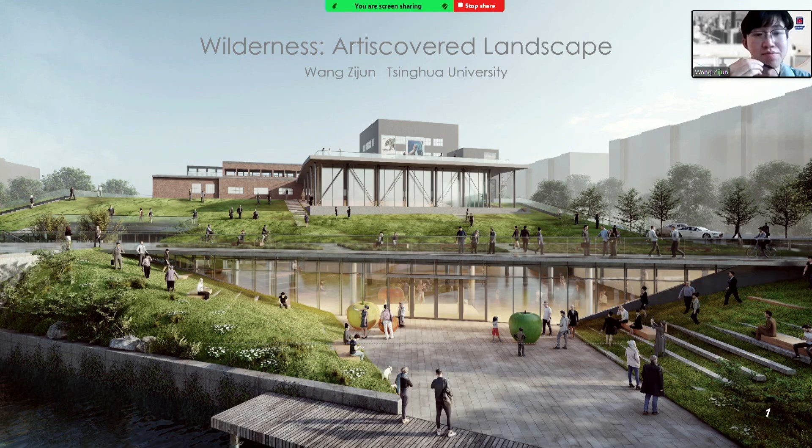The title of my project is The Wilderness: Artiscovered Landscape, and my design originates from the history and culture of this place.

As the city and campus expanded, the art community gradually disappeared. In the midst of policy changes, a group of artists mostly followed a large group to Tongzhou, the suburbs of Beijing, and the culture and artistic atmosphere that had formed at Tsinghua's North Gate moved with a very large number of the artists group. Here they experienced the transformation of their lives and left indelible footprints of their thoughts.

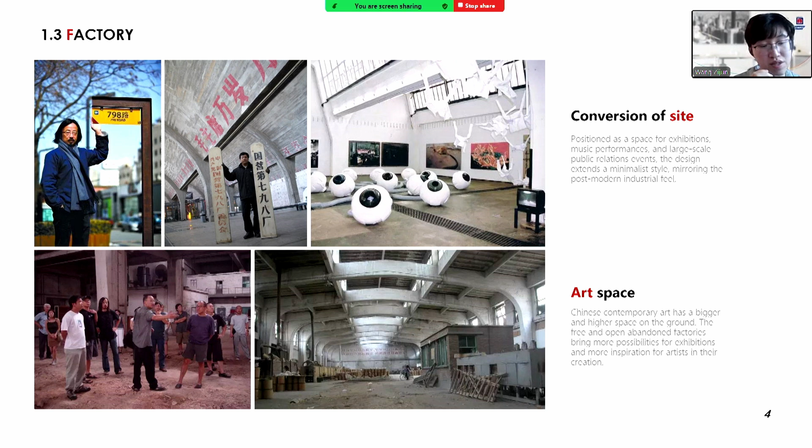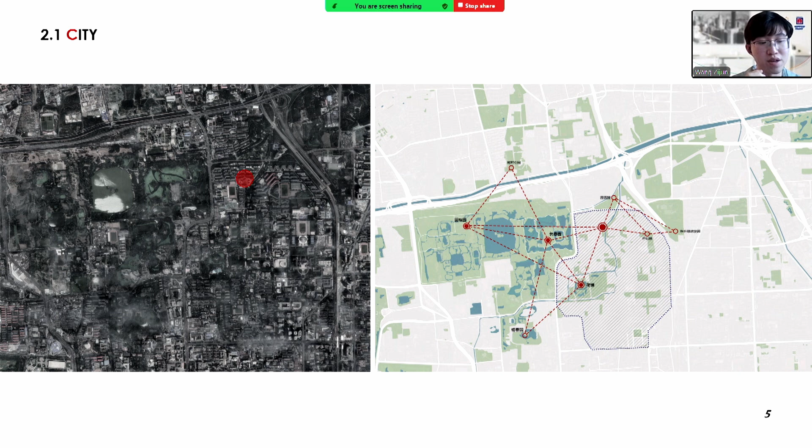The following two diagrams show the landscape pattern of this site, located in the heart of the Three Hills and Five Gardens in Haidian district of Beijing, corresponding to the surrounding country parks near the Yuan Garden. The original site of the building was the old Tsinghua power plant, no longer in use, which we hope to transform into a charging station and energy space for our campus and the community.

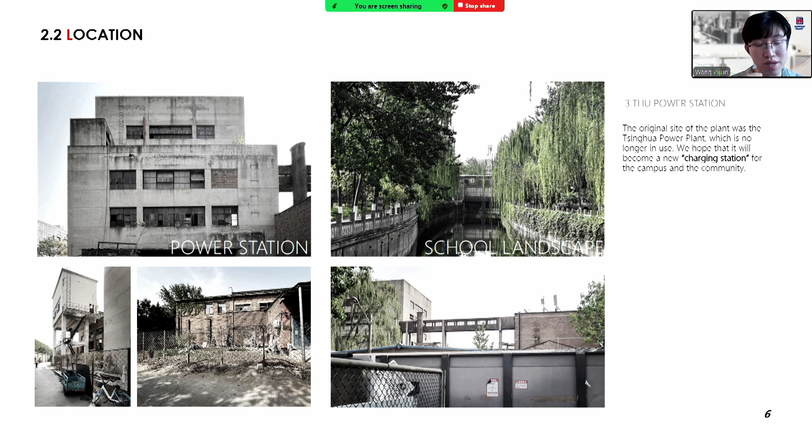Near the old power plant is Tsinghua University's river and greenbelt. We try to put the waterfront green landscape of the campus into the city and serve the people, old people and students in the neighborhood.

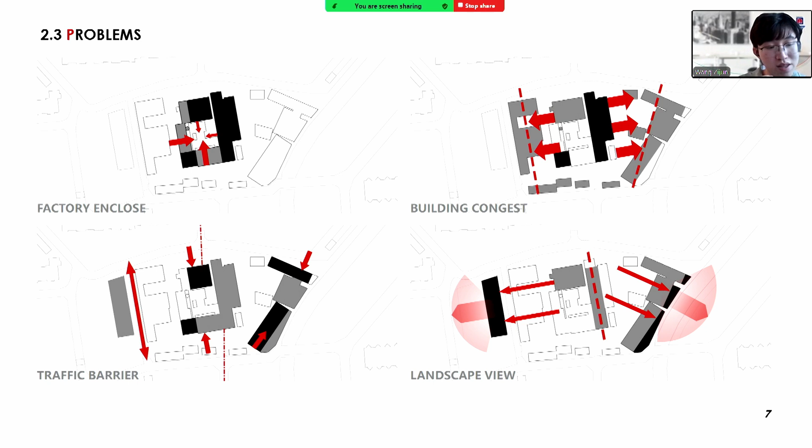Inside the site, the current situation presents the following problems. Each power plant encloses a centripetal space inside the site, and north-south traffic can be organized through the tall, long direction plant, but east-west traffic is blocked by the various small cottages around the plant. Although the east and west sides are surrounded by campus landscape, the good orientation is blocked by the existing buildings inside the factory.

So for my idea, artiscovered landscape means we try to make landscape-covered art. We focus on ecologically sustainable architectural design with large green roofs that create public space for users and contribute to the carbon decrease of the city.

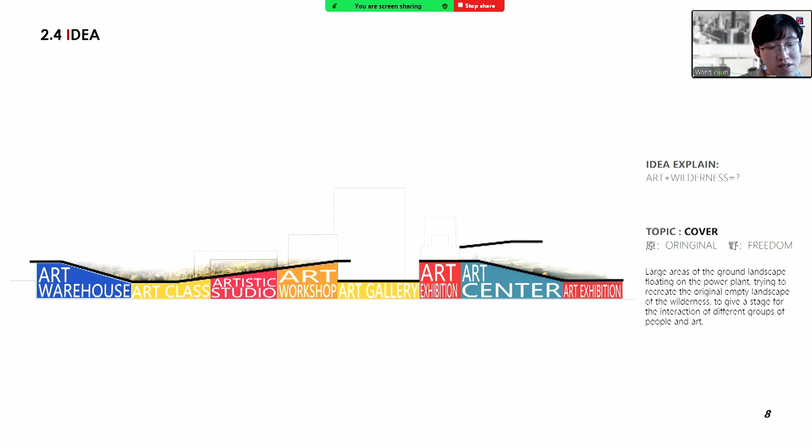In order to solve the problem of overcrowding of the original building within the site, we try to bury most of the function into the ground, and a large area of ground landscape floats on the former site of the power plant. The grassland covers the original factory and a lot of creative space.

Our formal generation is divided into two parts. The first is the treatment of the landscape within the site. Taking into account the existing site conditions, we bury a large number of new building volumes into the ground, on top of which we generate a possible path to organize the traffic.

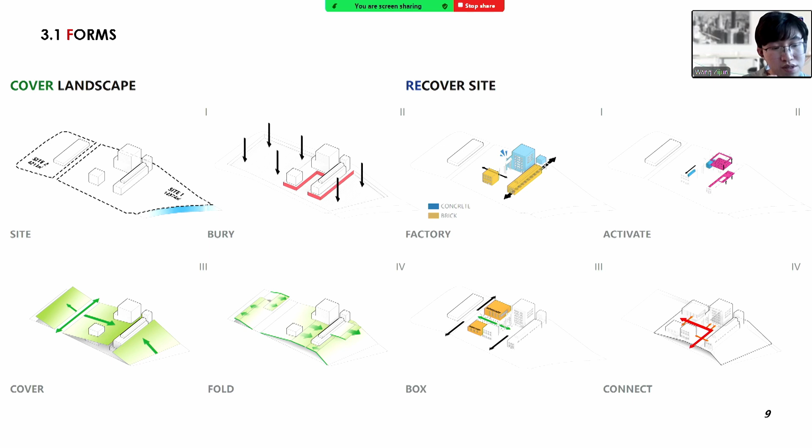Firstly, we respect the original material of the site, preserving the original brick and concrete house and placing a platform in them, building a new small workbox belonging to the artist community on the grass to realize the connection of the art community and the factory.

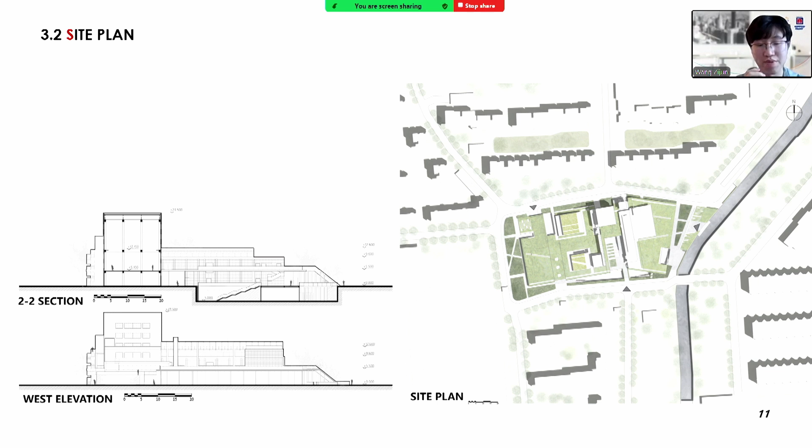As can be seen from the master plan, the building site is located at the boundary of Tsinghua's North Gate, which we have tried to transform from a single gate into a flexible landscape park. We use the original road network that can be crossed on foot, and our landscape design on the slope also combines actual factors for pedestrian and vehicle traffic to provide people with a variety of suitable walking experiences. In terms of traffic, we have a range of flow lines around the buildings controlled by the architecture axis.

We fully respect the original architecture texture of this site and use this as the basis of the control grid to limit the form and modulus of our buildings and to plan for a reasonable landscape orientation.

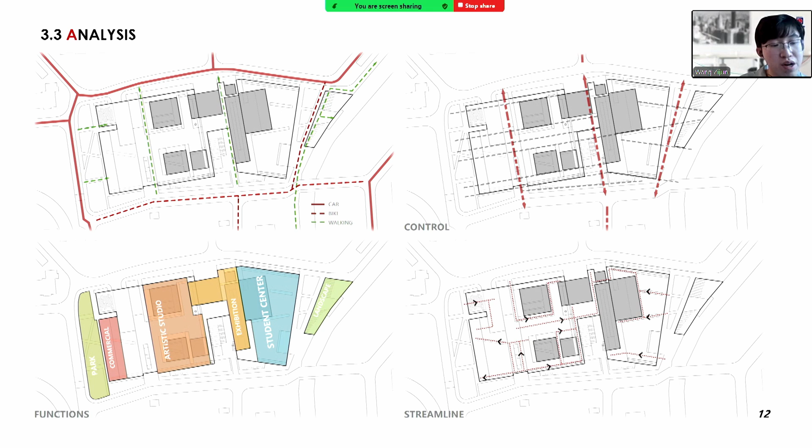In terms of the functional planning of the building, the central area of this factory is the core of the building, serving as a community for the artists, with an area for exhibitions, while the area near the campus and the east side serves as a student center.

And on the west side, artworks are scattered on the endless grassy slopes called wilderness, where people can freely stroll through, admire the artworks, and feel the nature and the wilderness.

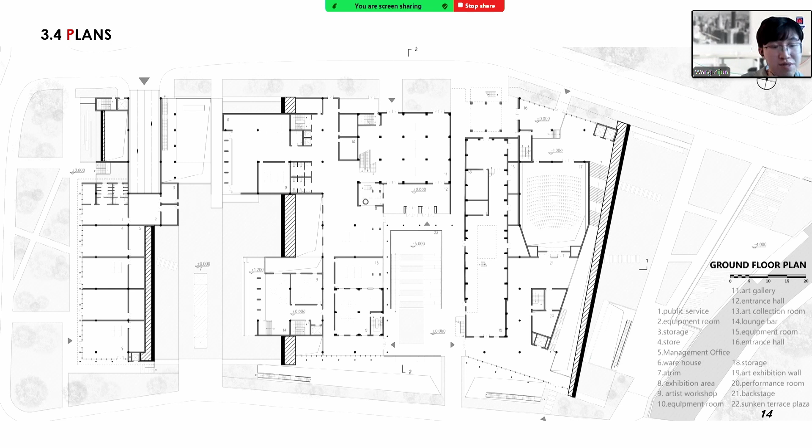In terms of planning, the first floor is mainly for the artist studio and community functions with commercial shops, and on the west side, a student activity center and a large lecture hall on the east side, and some artist studios and indoor exhibition halls are in the central part.

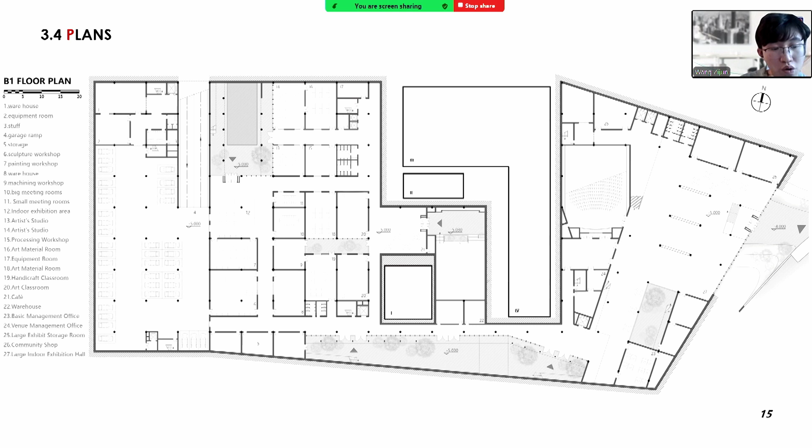The east side of the building opens up to the river bank for students' free activities and exhibitions. At the same time, we have fully considered the impact of the original foundation on our underground operations, so the new building volume avoids all possible foundations of the original factory.

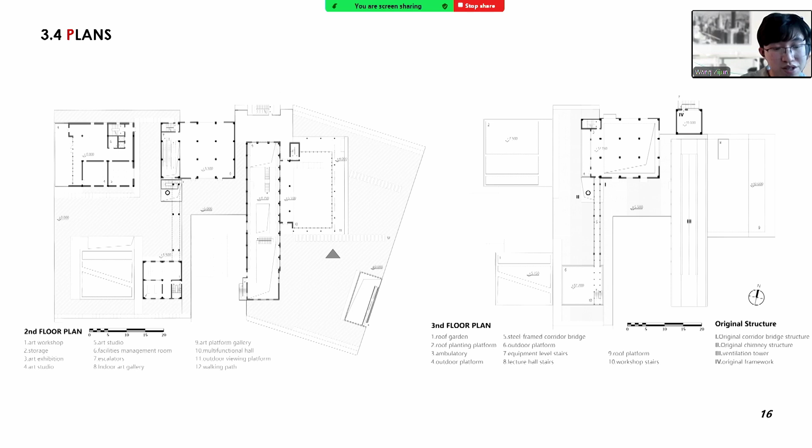The second and third floors are mainly for the renovation of the existing factories. We have arranged many artist studios, and the old factory building has been transformed into a core exhibition space for hanging special objects or graffiti art, injecting new artistic vitality into the old factory.

In the east to west direction, the horizontality of the building is fully reflected, and the folding and undulating roofs are intertwined with the original factory buildings, so that the atmosphere of art and the industrial legacy are intertwined with each other, in the green and ecological wilderness of the North Gate.

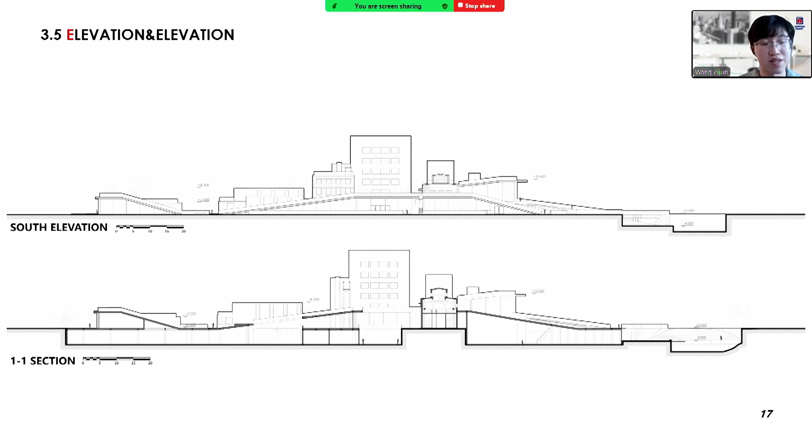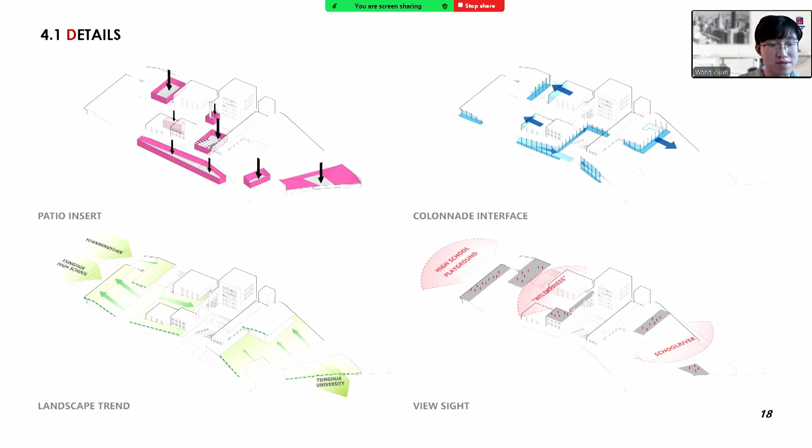In the area along the river, we break the original river bank by pressing downward, forming a more open waterfront platform, a grassy slope for visitors to rest, and a square in front of the underground exhibition hall.

The grass at the back extends higher up, on which we set up an open multi-purpose hall, which provides a perspective for the building back to the whole Tsinghua campus.

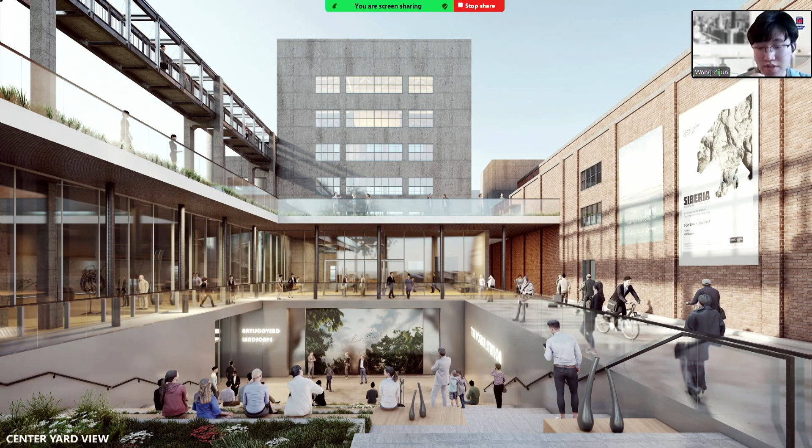Inside the building, which is surrounded by industrial factories, we set up a sunken courtyard, which becomes the gateway to the south of the building. In the courtyard, elder students, artists, and tourists can freely communicate and interact with each other. This is a social stage between the factories and neighborhood residents.

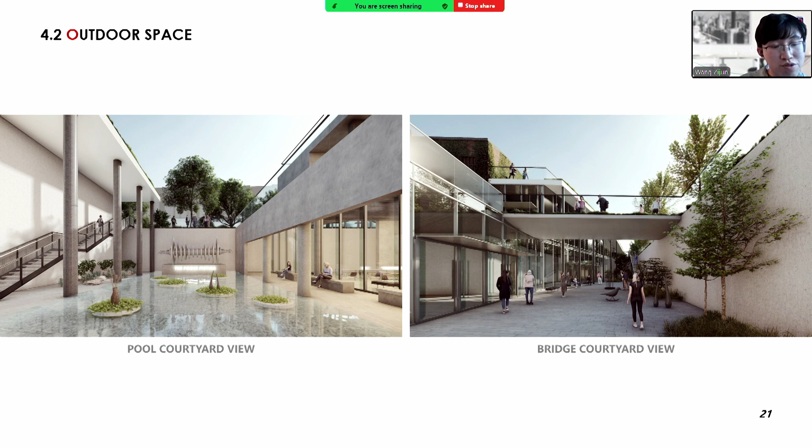In addition to the sunken stage, in the core, the building's internal green courtyards of various sizes are waiting to be discovered, all of which freely stand for artists to create their own work.

In the center of the site, the original chimneys have been retained and the original gallery bridges have been further modified. The slope creates a window to the west, from the grass slopes of the field in the near distance to the west mountains of Beijing in the far distance, all gathered here.

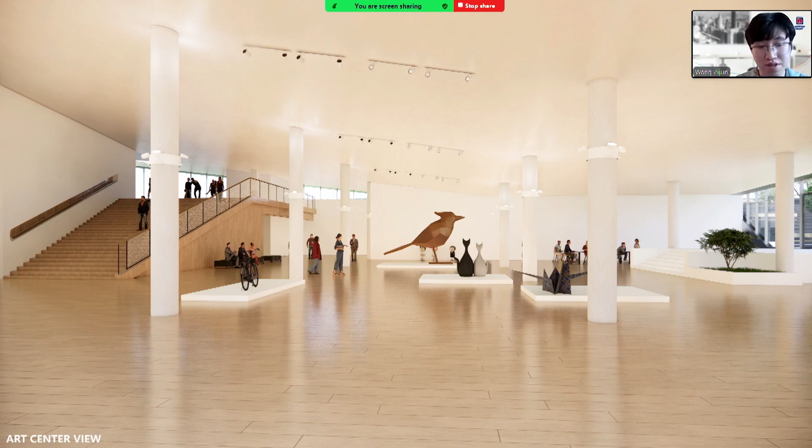Below the grass, the west side of the space opens up to the school river and becomes a large exhibition center, open to the community and the campus.

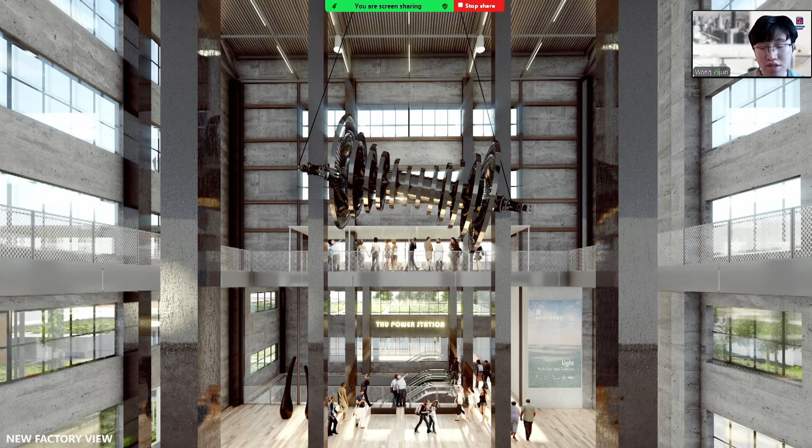The original power generation concrete plant has been transformed into an industrial museum to house the original heritage and related industrial artifacts. The power plant has witnessed the development of Tsinghua University over the years and has recorded the industrial changes in China's capital city, Beijing.

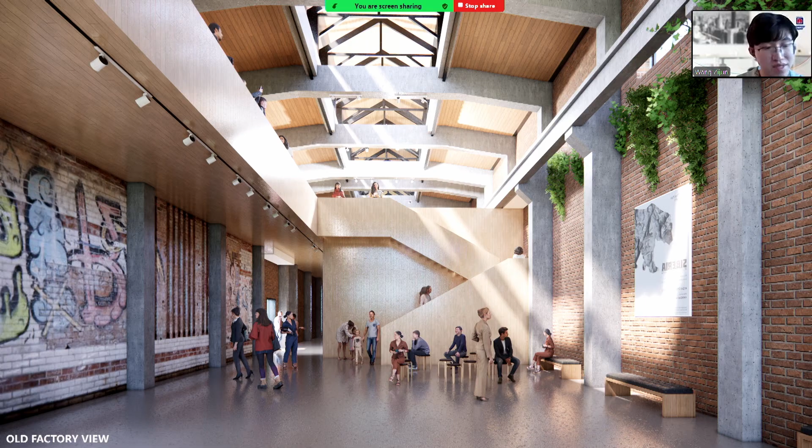The old red brick factory building has been transformed into a new gallery to house the works of the Tsinghua Northgate Art Group, the core of Tsinghua's time 30 years ago.

So, based on the functionality and the history of the site, we try to revitalize the old power plant with a touch of wild green and restore the enthusiastic art atmosphere of Tsinghua's Northgate.

Such a design originates from the students, the old people, the artists, and everyone in my university's Northgate, and we also hope it can serve everyone with a green and open gesture in the context of China's new era.

Together with my coworker Chen Haile from Tsinghua University, who is also my architecture idol. Thank you all.